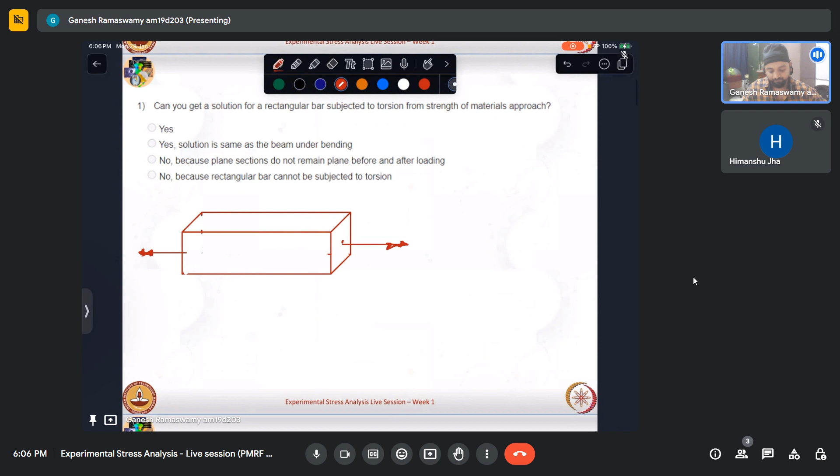So from strength of materials, what is it that we know? We basically make an assumption on the displacement and verify that with certain experiments if that is indeed holding. If that is holding, it helps us to get to the actual stress analysis without having to solve differential equations. So here the basic assumption is that the plane sections remain plane before and after loading.

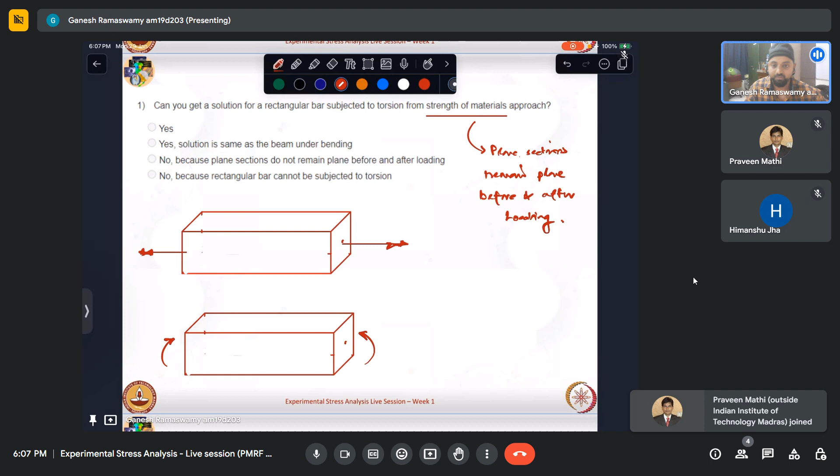So what does this basically imply? If this same beam, let us say this rectangular bar, if I was to bend this by applying two moments at the ends, that is if I take the same thing and apply couples at the end, then we know that this is subjected to pure bending. What is meant by pure bending? Essentially, there is a constant bending moment, so there is no shear in this beam.

In such a case, when we look at the deformed shape, if I were to just take this front face and view it as a two-dimensional figure, the deformed shape will be something like that. I'll just roughly draw this. So if I were to take a plane like that, the plane would be deformed to a plane like that. So whatever be the neutral axis that I have, the angle that the plane is making will be preserved. So it will still be normal. So that is the essence of plane sections remaining plane.

Whereas if we were to look at the case of torsion, this assumption of plane sections remaining plane before and after loading only holds in the case of a circular shaft. And this can be shown by experiments also. So there is a course on strength of materials offered by Professor K. Ramesh, a newly launched course that is also available on YouTube as well as the Swayam portal. So interested people can just watch a lecture on torsion, thought experiments, something, the name goes something like that. That actually shows an experiment conducted on a shaft where we are able to see that the plane sections indeed remain plane even after a torque is applied, even when it twists. Whereas that is not the case when we have a rectangular shaft.

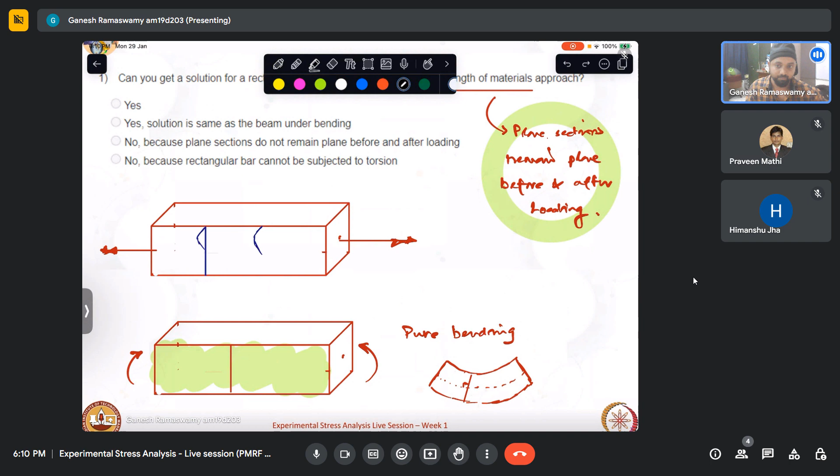So what happens here is essentially we will be seeing a line that is drawn like that will deviate like this. So it will no longer remain straight. So essentially we will have some out of plane displacement. If this is the plane, we will have some out of plane displacements, which is known as warping. So rectangular shafts are subjected to warping.

Does that mean that we cannot get the solution for rectangular shaft subjected to torsion? It is not so. We can get it provided we approach it from the stress potential, that is the theory of elasticity approach, rather than the strength of materials approach. So from strength of materials approach, this problem is consciously avoided. When we talk about torsion in strength of materials, we directly start with the circular shaft and we end it there. We don't discuss other shapes. A circle, and at best we will discuss hollow sections, that is axisymmetric, but we don't discuss rectangles and square shafts, whereas these are also used in practice. So the solution for this can be obtained using theory of elasticity approach.

So essentially plane sections do not remain plane in this case, which is why we cannot get the solution from strength of materials. The fourth option doesn't make sense, essentially we cannot constrain a bar from being subjected to any type of load, it depends on where the component is placed. So this is not in our hands, but whether we can analyze that using our theory is the essence of this question. So I suppose that that is clear.

The next question says displacement is represented as a number, a vector, a tensor, or can be any of the above. So which one do you think is the answer? Essentially, what do we mean by a number, a tensor and a vector? Take any mechanical quantity in a boundary value problem. Let us say we have a domain, and at that domain we have some point, subjected to some load. Essentially, displacement is a vector, but I'll go through a brief on what a tensor is and what a scalar number represents.

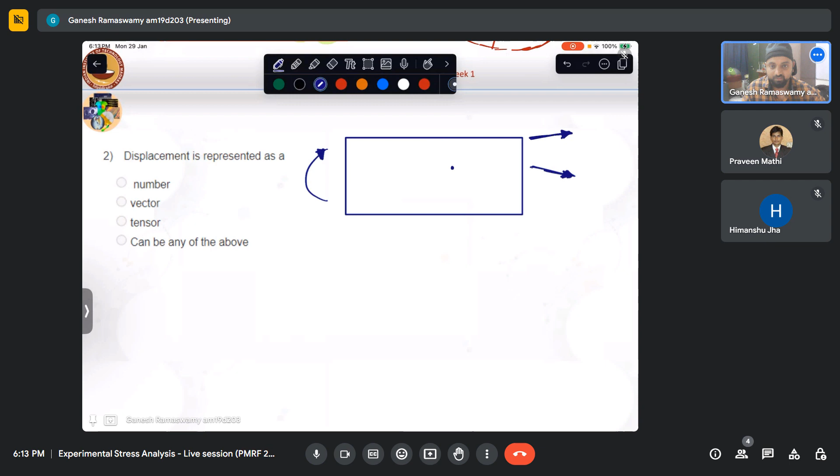If I take this point and zoom in, I'm only talking about the in-plane response right now, not the out-of-plane response. We essentially have four planes: plane 1, plane 2, plane 3, and plane 4. At each of these planes, I have some sort of traction acting. When it is dependent on the plane as well as the direction of the force applied, it has dependence on two directions. That is why it is called a second order tensor. So stress and strain are second order tensors.

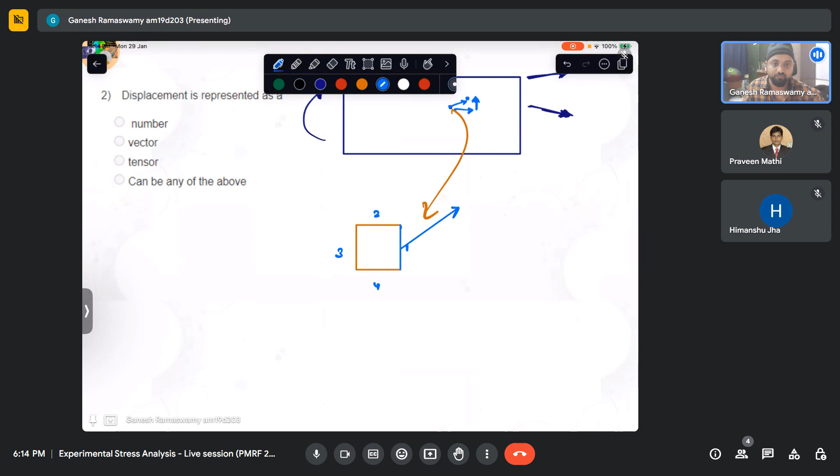Whereas displacement has only three components. Anywhere in three-dimensional space, we can characterize displacement. This point moves to here, and we can characterize that by the three displacement components: u, v, and w. Since we are talking about the same plane, the displacement along w, the out-of-plane displacement, would be 0. So that is why displacement is represented as a vector.

In any mechanical problem, the idea is to relate forces to displacements. In engineering mechanics, if we idealize the body as rigid, we have seen how these two are related. Whatever force we apply creates an acceleration, and acceleration is nothing but the second derivative of the displacement. So F equals m u double dot, if I call the displacement u. That is how this is related.

Whereas when we talk about deformable bodies, and in reality all bodies are deformable, we need to go to strains. From there, we need to relate them to stresses. This stress is at a point, so as a whole we need to integrate it throughout the domain of the body in order to get to forces. This is the basic route in which we go: from displacements to strains, which is our strain, then stress, and that is forces.

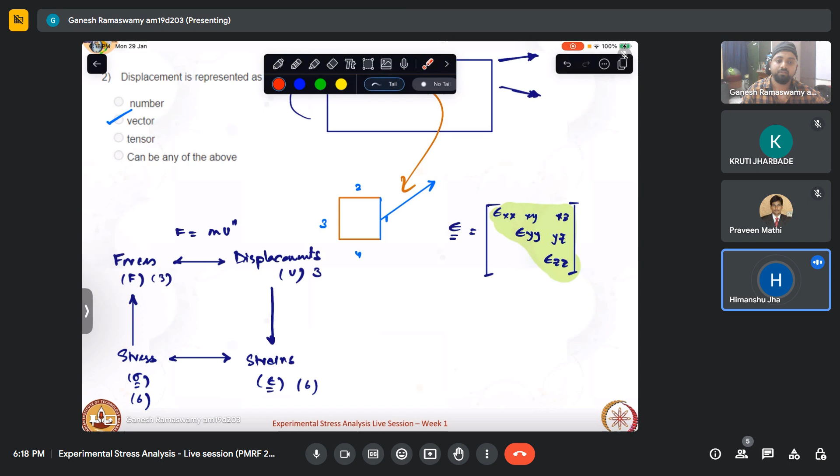So the thing is, at a plane, whatever quantity is under consideration, it has a dependence on the plane as well as the direction in which it is applied. For example, this plane can have forces applied in infinite directions. So there is one directional dependence that is characterized by this very plane. What is a plane characterized by? How do you identify any plane? We identify it by its outward normal. And then we have a force that is applied on this plane, which can be in any arbitrary direction.

Let us say that is the direction. So this is direction number 1. This is direction number 2. And then we have a magnitude associated with that force that is being applied. So a single magnitude, and then a bidirectional dependence. That is, two directions it is dependent on. So that is why we are able to see that there are two subscripts here, right? One represents the plane on which we are considering it, and the other represents the direction in which the quantity is going. So when these two come into the dependence, it is called a second order tensor. Is that clear?

What is the rank? Yeah, rank is, as I said, the two directions that are there, right? First is the direction in which the force is applied, and the plane that we are considering, the direction that is characterizing the outward normal. So these are the two. So this is the rank.

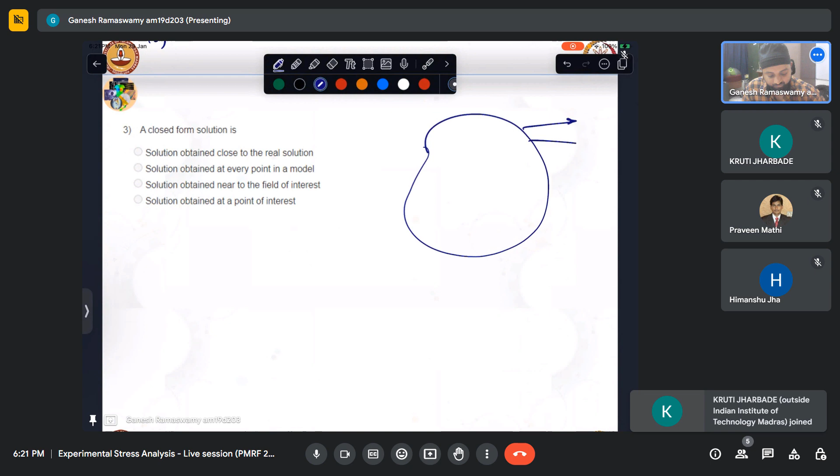So let us get to the next question. This says a closed form solution is which of the following? The first option is the solution obtained close to the real solution, solution obtained at every point in the model, solution obtained near to the field of interest, solution obtained at the point of interest. So if we see, essentially, if we have a body and then it is subjected to some forces, it is constrained also, maybe at some point.

So by analytical means, what is our interest? Essentially, our interest in stress analysis is to be able to compute displacements, strains, and stresses. So in any problem, if we are able to compute these three at every point in the model domain, given any point, I can get an expression. Let us say this is x, this is y, and then we have z. For example, if we take the XYZ coordinate system, in this body subjected to a particular kind of loading and support constraints, given the coordinates of any material point in this body, if I'm able to get all of these quantities, it is called a closed form solution.

So closed form solutions essentially, as it is said in the lecture also, it is a luxury to get. Not all problems have closed form solutions. So our first attempt is the closed form solution. If we can get that by any means, we go about doing that.

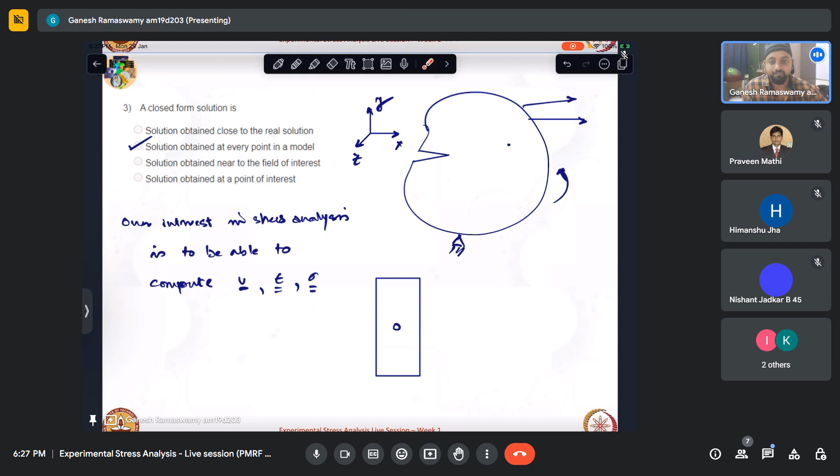Solution obtained near to the field of interest is again some kind of approximation that we are making, and it is obtained at a point. Now this generally happens in experiments, where certain techniques are labeled appropriately as point by point techniques. So we can only get one piece of information at one point. If we have to get this information at another point, then we have to redo the experiment again. So that is essentially a point by point solution. You can say in a way that the integration of this point by point technique over the entire domain of our interest, the material body, is what gives us the closed form solution. So I hope that is clear.

So if there are any questions, you please feel free to ask. In the meantime, I'll move on. Okay.

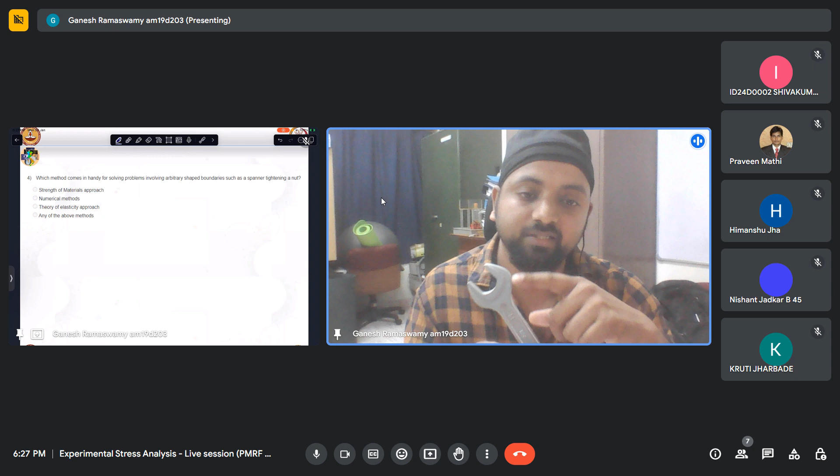So which method is handy in solving problems involving arbitrary shaped boundaries such as a spanner tightening a nut? As we saw, you can see clearly that this is characterized by a particular curve. This may be an amalgamation of many curves. In order to characterize this body, first, this is a boundary value problem because this has a fixed domain. So I have to define my boundary conditions over this domain. Now, can I characterize a coordinate system that can capture this entire curve? That is a big challenge. That is why we don't have closed form solutions for this, because it is not possible to capture the entire boundary, the entire domain using our normal analytical coordinates.

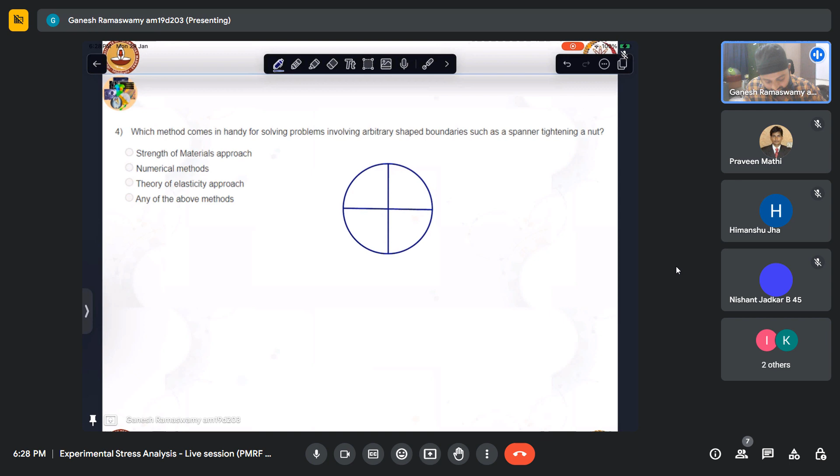So we have to resort to numerical modeling in order to do that, because the essence of numerical modeling is that it will divide this entire domain into very small parts. So for example, if I have to take a circle and I am constrained that I have to recreate the circle only using triangles, the first attempt I can make is like that.

So for example, this will be my first attempt at that. I can see that it is not representing the circle faithfully. It is just a crude approximation. So the next will be, let us say that I make it finer. Now this time I can have more points like these. So what this does is this makes it a little finer. I'll close with this. I won't draw all the possible combinations naturally.

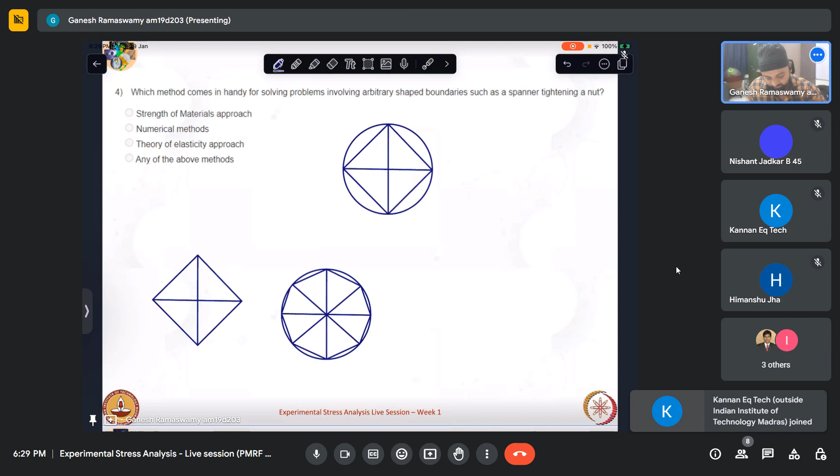So if I were to close this, and let us say I remove this, now I can see that this is a much better approximation of the geometry, of the circular geometry. So like this, if I were to make the size of this triangle very, very narrow, then it is approximately approaching the actual boundary. So this is what numerical methods do. That is why we are able to solve complex boundaries using numerical techniques.

So each and every one of these elements has to be put in one form and solved in order to get the response of this actual circle under some mechanical stress. So that is how numerical approaches go about solving these. So the advantage is that any type of complex boundary, I can capture it and make the computer run simulations in order to run calculations to get my stresses. So that is why numerical techniques can handle this problem conveniently.

The strength of material approach is anyway very limited, even within its scope, to very simple problems like a rectangular beam under bending, a circular shaft under torsion. As we saw, even a rectangular shaft under torsion cannot be approached using the strength of material approach. So that also requires a theory of elasticity approach. And even with this, there are only a handful of problems that we can solve. Essentially, how theory of elasticity got developed is we formulated the solutions first using the stress potential approach, and then we tried to fit it to different problems that were prevalent at that time. It's quite useful, but nonetheless, it is not exhaustive. In order to solve even a day-to-day problem like a spanner tightening a nut, we require numerical methods.

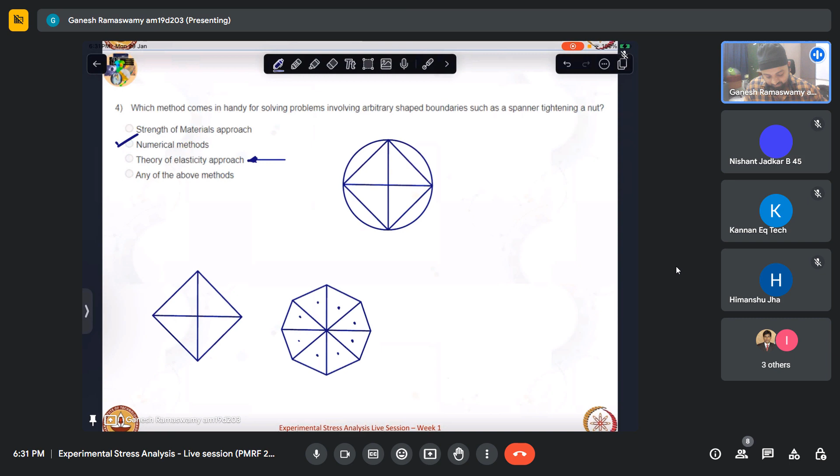Now, this being one constraint, if numerical methods can solve everything, that begs the question, then why at all do we need experiments? In numerical methods, we are only defining the boundary conditions and the geometry. So there is no confirmation that what we have defined is correct. It is not objective in that way. Any number of people can define it in any form, but ultimately there is only one response that needs to be captured. So how close we go towards that response is what the entire thing is about.

So that is why it is desirable that when we make a numerical model for a complex problem, at least one load case, if we were able to demonstrate that the response of that numerical model is similar to that observed in actual practice, then we are at least confident that whatever modeling we have done is faithfully capturing the phenomenon. Then what is the way to observe the actual response? That we do experiments on the actual prototype.

Now, there are certain problems which are too big to be accommodated with the actual prototype. For example, in the shipping industry, if we want to do stress analysis on some big ship and test the numerical model, making an entire ship is not a workable solution. So that is when we try to scale it down and create model experiments capturing the essence. A model experiment has a challenge that our loading jigs should be appropriately modeled in order to apply loads that are similar to the actual real life situation. So there are challenges at every step, but nonetheless, using all these wisely with engineering acumen, we try to approach the problems and do our design evaluation.

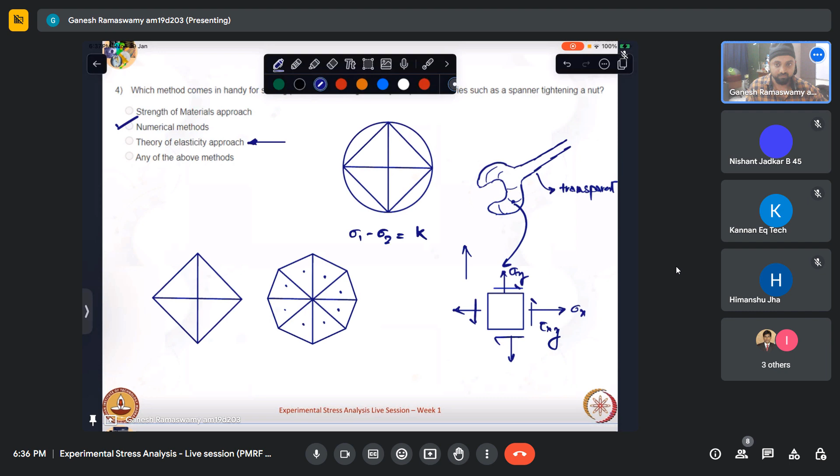Is it clear, sir? Someone who had asked that question. Have I answered you at least partially? Yeah, so how this pattern gets formed, that we will see as we go about in the course when we discuss the essence of how transmission photoelasticity works.

So, why are we trying to see this? What has this got to do with our stress analysis? It is because the technique of photoelasticity is based on the principle of stress induced birefringence. So when we talk about refractive index, we are of the notion that there is only one refractive index for one material. There are certain specific materials which, when they are stressed, develop two refractive indices. So that means there are two different velocities of light through the very same medium when it is stressed. What these two velocities bring about, what changes they bring about, is what we are trying to study, and this manifests itself in the form of fringes. So that is why we are trying to introduce certain things now so that we are familiar with these terms. When we go to the development of transmission photoelasticity, it will not be that hard for us to take it from there.

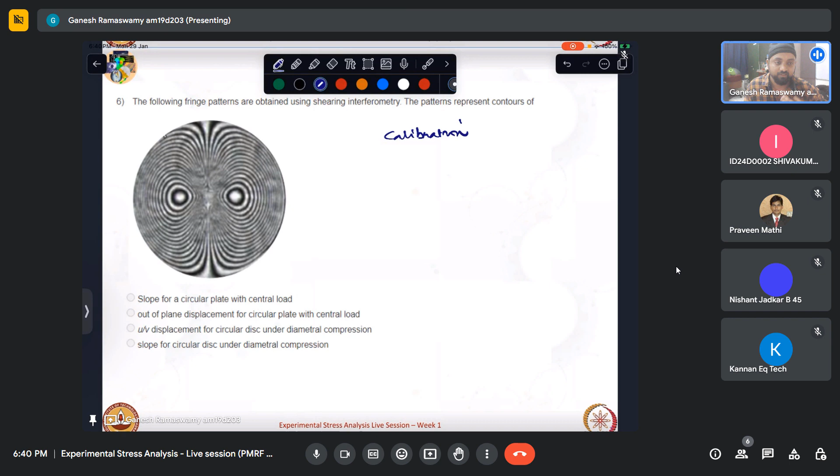Now, for the unknown problem that we are trying to study, we don't know what to anticipate. So naturally, before we conduct the experiment for an unknown problem, we will conduct it for a known problem. There are certain benchmark known problems that have developed over time. From strength of material, it could be 4-point bending, pure bending, that is.

From theory of elasticity, there is a disk under compression along the diameter. This is one of the problems. Each and every problem has its own application. That is, each and every experimental method will employ one type of problem which will be standardized for that, which will be used to see if all the connections, all the setup is correct. Once we are confident that that is correct, then we will move on to conducting the actual test experiment, which we are trying to study.

In that respect, now we saw that there are displacement components that we have to measure. There are strain components that we have to measure, as well as stress components that we have to measure. There is no experimental technique that can measure all of these. So every experimental technique is limited to measuring certain quantities out of these. Now when we are talking about in-plane response, that is, there is a disk which is subjected to this type of loading.

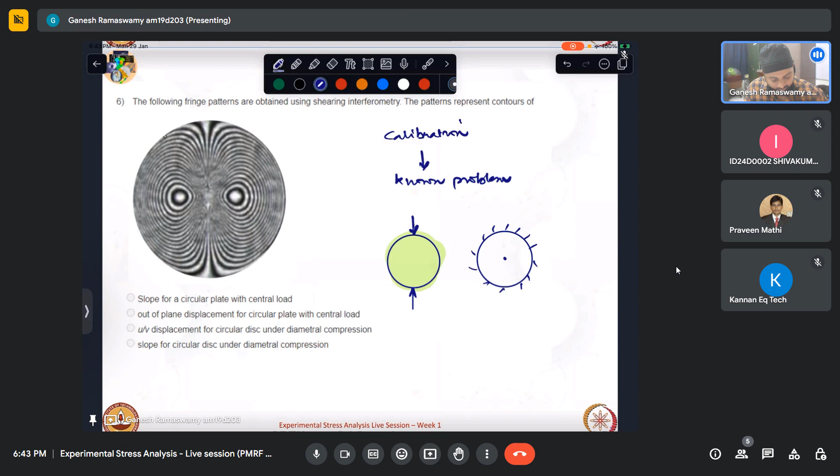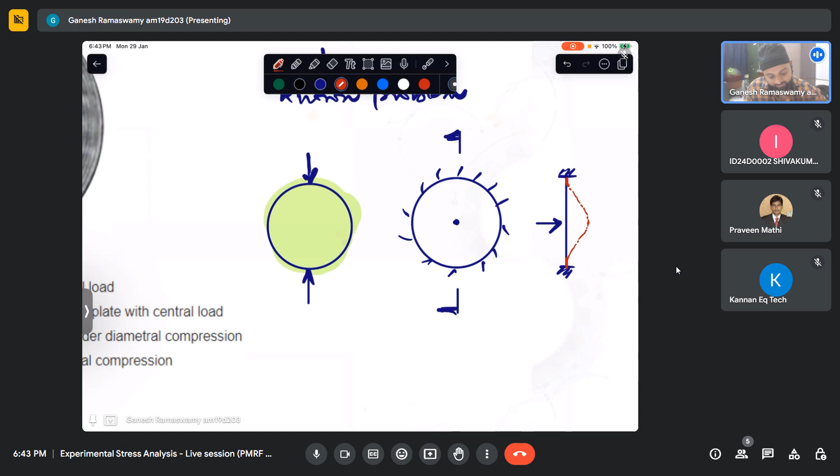This load is actually applied into the plane of the paper. I hope you can visualize that. That is, if I were to view it like this, what I will see is a plate that is clamped, which is loaded like this. And how will its deformed shape be? I know that slope here will be 0. Here, because it is symmetrically loaded, based on symmetry, I can say the maximum displacement will be at the center. It will again go back to 0. And because it's an axisymmetric problem, this curve will be symmetrical about the horizontal. So this happens to be the standard problem for the techniques that measure out of plane displacements.

Now, for this problem of a clamped circular plate subjected to a central load, we have a closed form expression from theory of elasticity. If any of you have done a course on plates and shells, this will be the first problem you will solve when you go to polar coordinates from rectangular coordinates. So for this, we generally use the general Michell solution, and then we take advantage of the axisymmetric nature of the solution. So there is no angular dependence, there is only radial dependence. Like that, we will try to apply the boundary conditions and come up with the solution. Those solutions are already given in one of the lectures from the first three.

Now, those closed form solutions, what does that mean? By taking this as the origin, for any r, if I have a point here, it is at a distance r. So at any r, I'll be able to get the out of plane displacement. If I were to plot this using contours, let us say my curve is like that. What is it that I'll do? I'll run lines like that. At each and every such plane, whatever I'm seeing, I will try to club it.

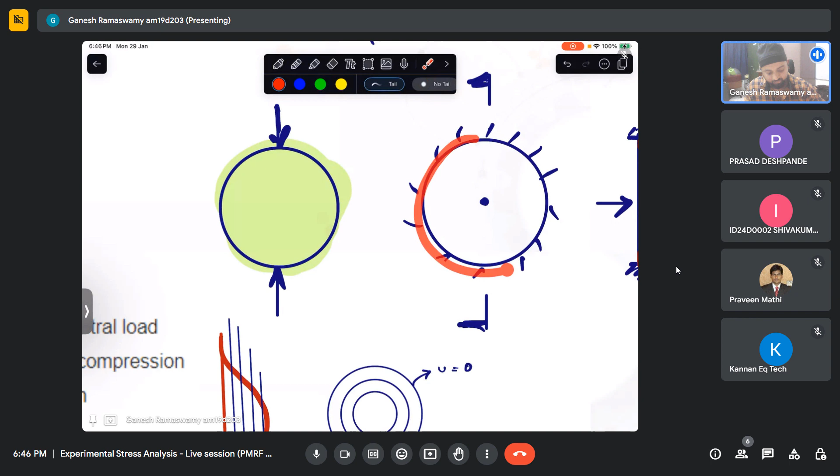What this represents is the out of plane displacement. Initially, there will be displacement equal to 0. Why displacement equal to 0? Because this is clamped around the border. Around the border, there is no out of plane displacement. Then there will be displacement equal to 1, 2. I'm just saying integers. It will be a continuous curve. So like that, it will be concentric circles. Such a curve is essentially the representation of out of plane displacement.

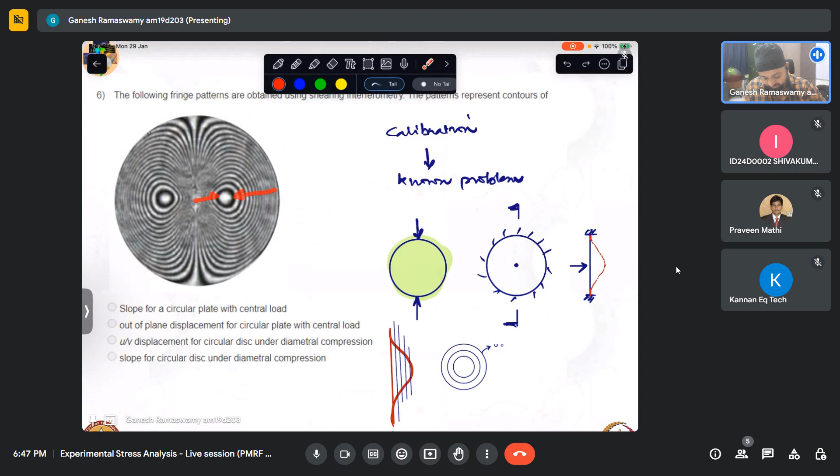Here we are able to see that this shows a peak here as well as a peak here, and then it shows a reversal. Why that happens is because this is clamped at these ends, we have an inflection point here. So essentially, this is nothing but the slope. You can readily see this in the lecture. This pattern is shown and it is already labeled as slope. I'm just trying to walk you through how this came about and to think about what that pattern might represent.

Now, let us say the disk would have been clamped at the ends, and then at the center an out of plane load is applied. But I'm able to see that the response is actually this way. Here there seems to be no reversal. So it is safe to assume that the reversal is a function of x. So this is nothing but the slope of the circular plate in the x direction.

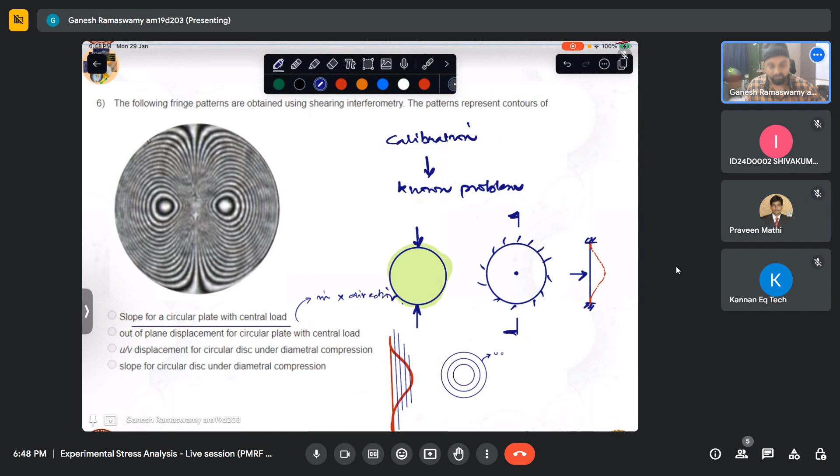Now because of axis symmetry, how will it look in the y direction? What I meant is when we look at this in the y direction, essentially these two eyes will appear there instead of horizontal. So that will be the slope in the y direction. So this is nothing but our slope in the x direction.

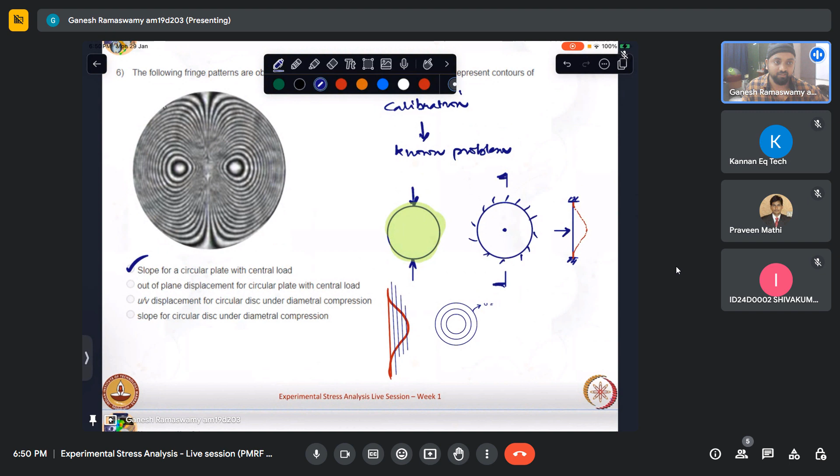Out of plane displacement of a circular plate with a central load, we know that because of the axis symmetry, it has to be a symmetric pattern. This essentially is not a symmetric pattern about the vertical. So this definitely cannot be out of plane displacement because the problem is symmetric. So like that also you can start reasoning it out.

But I would encourage any of you who is interested to at least plot these patterns once and see. It is not very difficult. You already have the expression in MATLAB. You just have to type these out, MATLAB or Mathematica, whichever you are comfortable with, and plot the contours and see how they look. When you have a visual appreciation of that, and then go do the experiment, it'll be more exciting that way. So I hope that is clear.

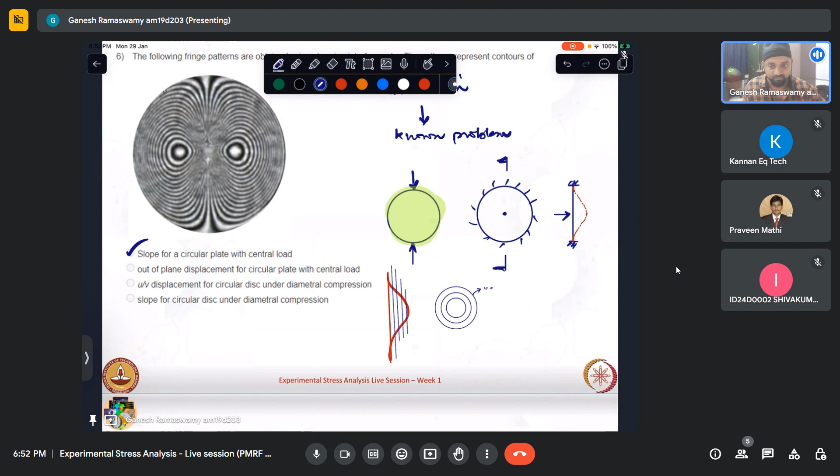Are there any questions? Not necessarily related to this aspect, but in general in stress analysis? Because otherwise, it is just one way I'll go on solving problems. It will be a little dry. So if you have any questions, please feel free to stop me and ask them midway. Okay. Yes, sir, please go ahead. Okay, no problem. I'll be sharing these videos also, so you can catch up collectively. And if you have any questions, you can bring them up as and when you get them.

Okay. So question 7. On solving a beam under pure bending using analytical method, taking plane stress assumption, one gets which of the following? So first, let us draw the beam that they are talking about. Since it is plane stress assumption, I need not worry about the out of plane response. So I may as well confine my beam to this plane. So this is my beam. Now it says that the beam is subjected to pure bending. So let me take this beam and subject it to pure bending. What does that mean? It is subjected to a constant bending moment throughout. Let us call that M.

Okay. So now, how will this get deformed? We know it will get deformed something like that. Something like that.

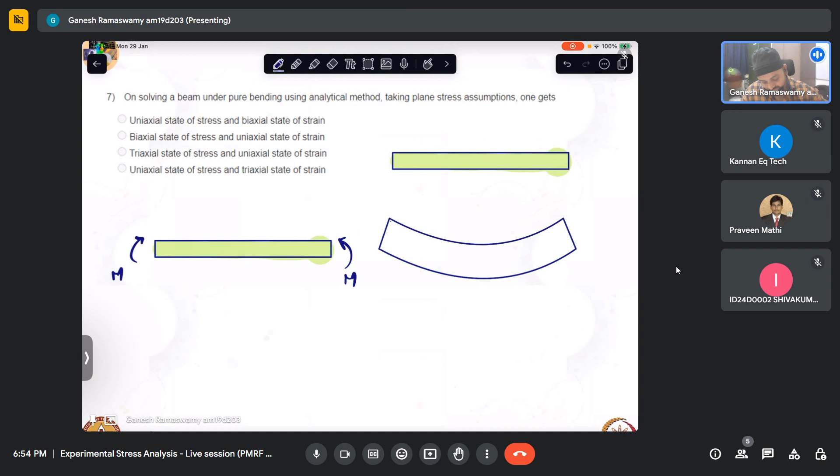So the top fiber will be in compression, the bottom fiber will be in tension. Okay. So now, if this is my neutral axis, at any point from the flexure formula, what is it that I know? I won't derive the flexure formula because that is already done in our strength of materials course. You can just revisit that.

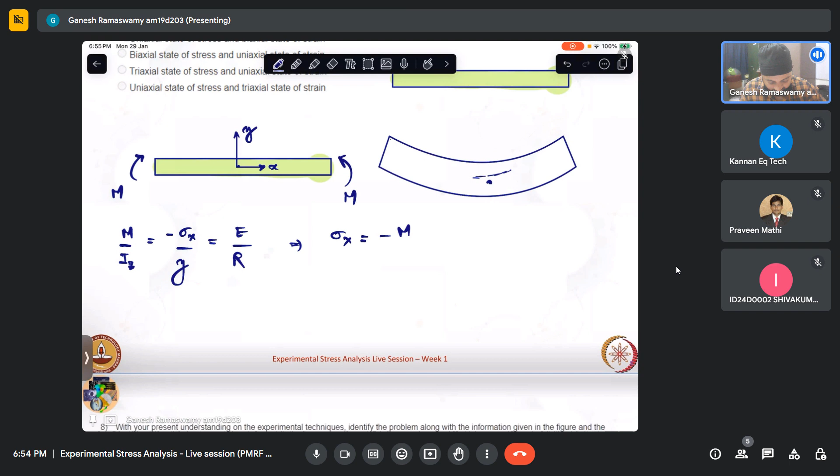So it says M by Iz essentially, with this as X, this as Y. So XY. So Z will be out of the plane of the paper. So sigma x by y equals minus E by R, or rho, or whatever you take to represent the radius of curvature. So what we are able to see here is sigma x, given a moment, is nothing but minus M by Iz into y.

The section is not changing. The bending moment applied, I have applied, is not changing. So essentially, this quantity is a constant. So I can see that my sigma x is proportional to y. So it is having a linear variation.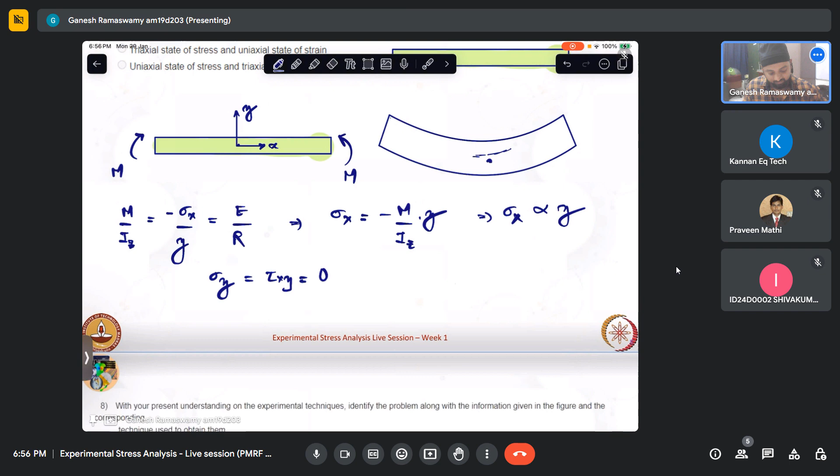Now, what they are asking is, again, this is only talking about sigma x. Sigma y and tau xy come out to be 0. Why? Tau xy is 0 because there is no shear. Sigma y again is 0 because there is no traction in the y direction. So essentially we have only one stress component, which is sigma x, which varies linearly. So if I have a line like that, it will vary linearly. This is compression, this is tension. That is the variation of sigma x about the neutral axis.

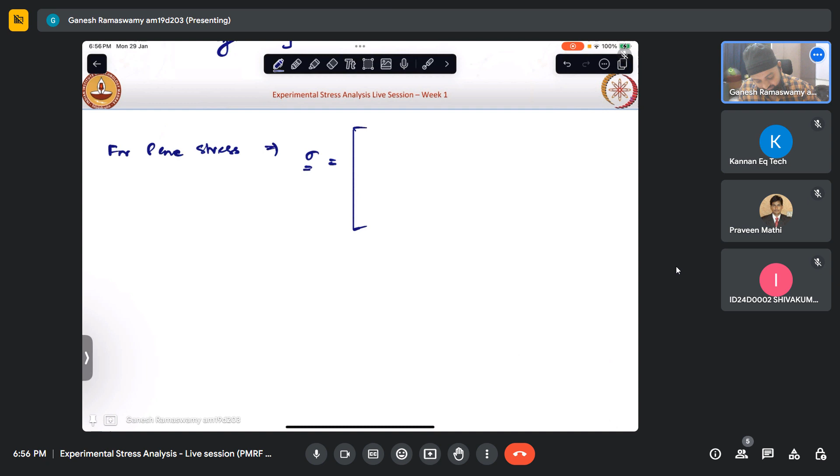So if I have to represent this stress state, what does a stress tensor look like? Let me not say plane stress. In general, how do we populate a stress tensor? So this is sigma xx, sigma yy, sigma zz, sigma xy, or tau xy, let me say tau xy rather. And these are just symmetrical, so I'm not going to write them.

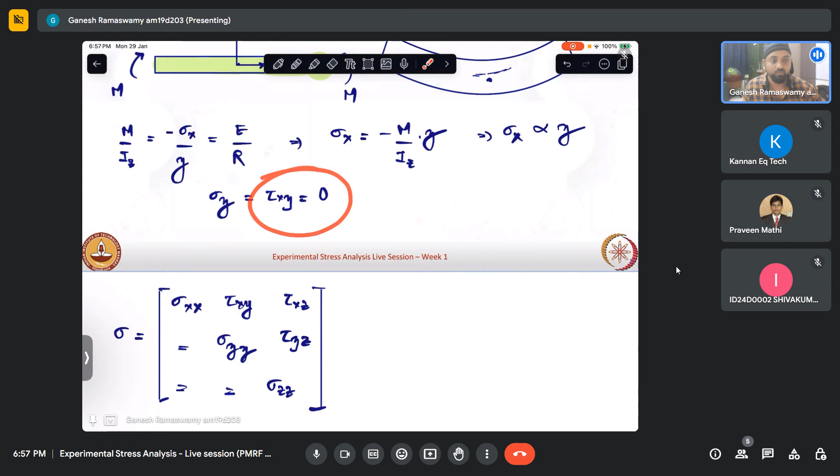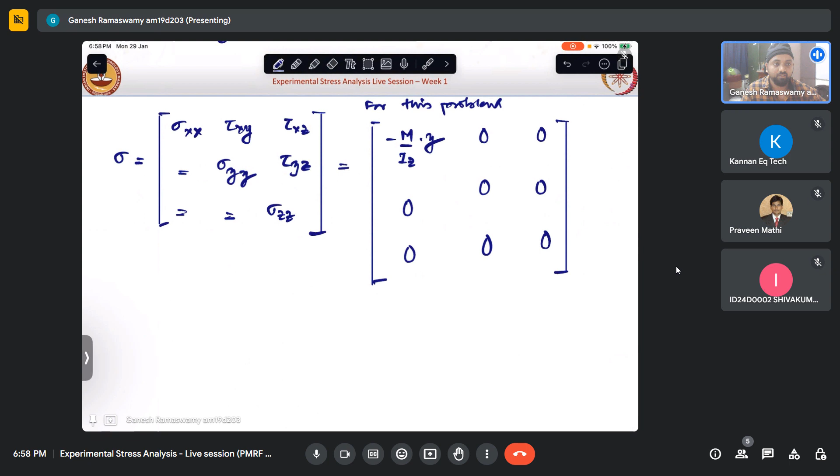Now, if I were to populate my stress tensor for this problem, I know from here that sigma x is nothing but some constant into y. Sigma y is 0. Tau xy is 0. So let me populate this for this problem. I have this as minus M by Iz into y. So the first term is done. We have seen tau xy is 0 because there is no shear. Sigma yy we know is 0 because there is no traction. Now, by virtue of our plane stress, all the out of plane stresses are 0. So this is 0 and this is also 0. So this is my stress tensor essentially, which is uniaxial stress.

Now let us go to strain. So how do we define strain? Strain is nothing but stress by E minus mu by E trace of sigma I, the constitutive Hooke's law basically. What are the strain components? How do we calculate the strain components? Essentially, we know epsilon xx is nothing but sigma xx by E minus mu sigma yy by E minus mu sigma zz by E. And this goes on cyclically. Epsilon yy is this quantity

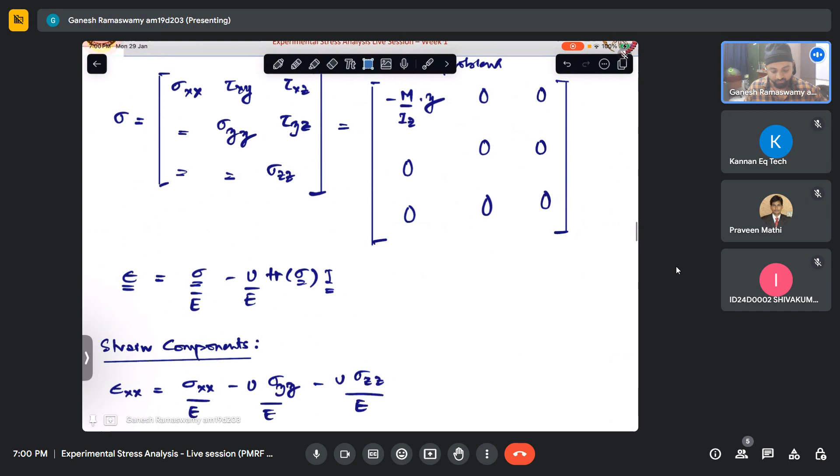minus mu, same thing will come here, and then epsilon zz is this minus mu. Let me write it this way. So this is the general Hooke's law. I'm writing only normal stresses. Shear stresses are anyway decoupled from the normal stresses. Shear strains are also decoupled from the normal strains. So when shear stresses are 0, shear strains are also 0. So I'm not talking about shear strain. Let me talk about only normal strains.

Now I can see, in the case of plane stress, I have sigma yy from my stress tensor. I know only sigma xx exists, the other two are 0. So I can knock off the other two terms. So sigma yy is 0, sigma zz is 0. I can see that because of the Poisson's effect, I still have non-zero quantities in the yy and zz directions. So anyway, I suppose many of you knew this, but I'm just writing this for the sake of completeness.

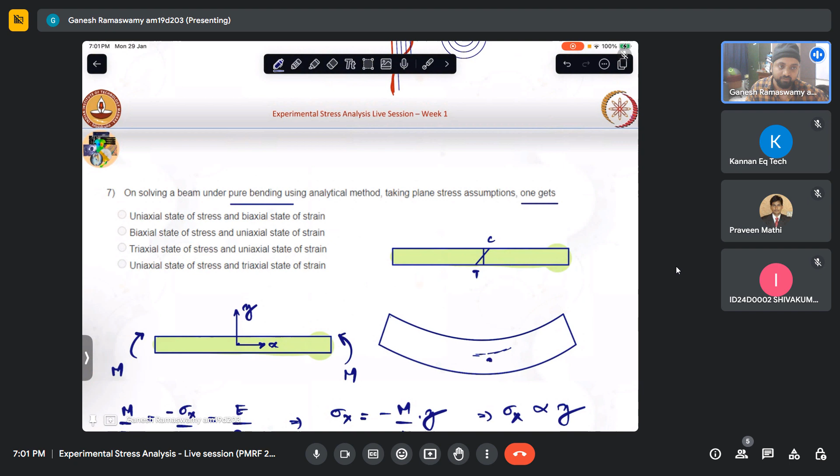So what this implies is, for the case of a beam under pure bending using analytical methods, taking the plane stress assumption, we have a uniaxial stress state and a triaxial state of strain. Why triaxial? Because we have epsilon xx, yy and zz. We have strain in three directions because of the Poisson's effect. So I hope that that is clear. If there are any questions, please feel free to ask.

Okay, fine. So let me move on to the next question. With your present understanding of the experimental techniques, present understanding meaning whatever is covered in week 1, identify the problem along with the information given in the figure and the corresponding technique to obtain them. Now one thing we can readily see is something like that is given. This essentially represents the

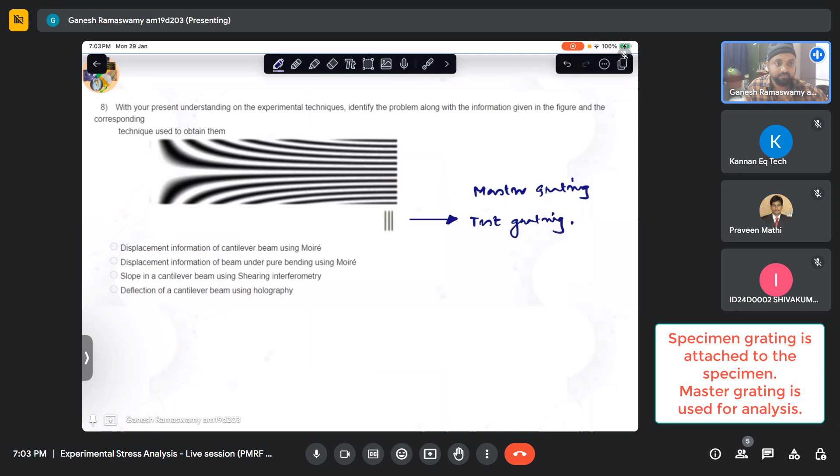There is something called a master grating, and then there is a name to this grating also. That is, the specimen grating will be applied to the specimen, and this grating, test grating, I'll just clarify that and mention it here. So let me just call it test grating as of now. So essentially, when we apply a master grating and then we view it with this, we'll get certain patterns because of interference. So this is essentially from the technique of Moire, which measures displacement components.

So from here we can see, if we go through the lectures also, we'll see that whenever a grating is put in one direction, we essentially get the displacement perpendicular to that grating direction. So we can see that our gratings are like this. So we will be getting displacements along this direction. If the grating were actually like this, then we will be getting displacement along the vertical. So here we are sure that our grating is vertical.

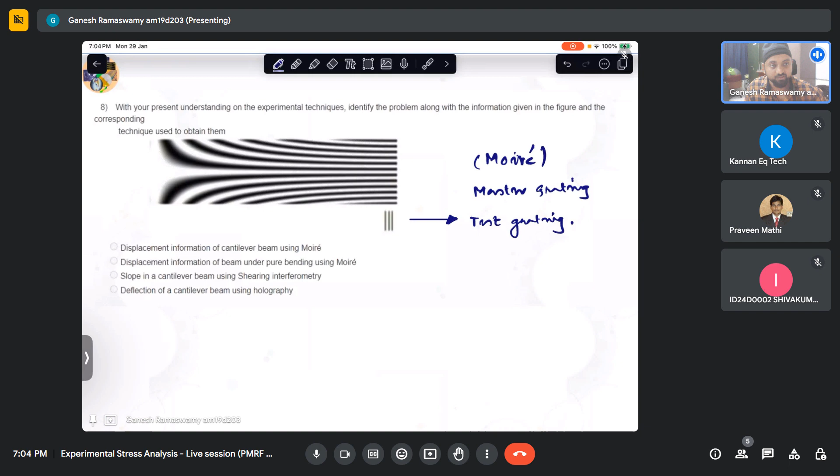So the displacement, first of all, this is Moire. So Moire measures displacement. So in that displacement, due to this grating direction, I can see this is specific to U displacement along X, where I define X like that, Y like that, and Z like that. So I am essentially having displacement along this direction. That is what I'm measuring with this grating.

And from the very problem, we can see, let us see the options. Displacement information, and then slope and deflection. Since we are having a grating, we are talking about displacement only. So slope is not the answer. Now, deflection of a cantilever beam. Essentially, deflection, if we consider this to be the cantilever beam, will be in the vertical direction. And since we have already deduced that this is in the x direction, this is not the answer.

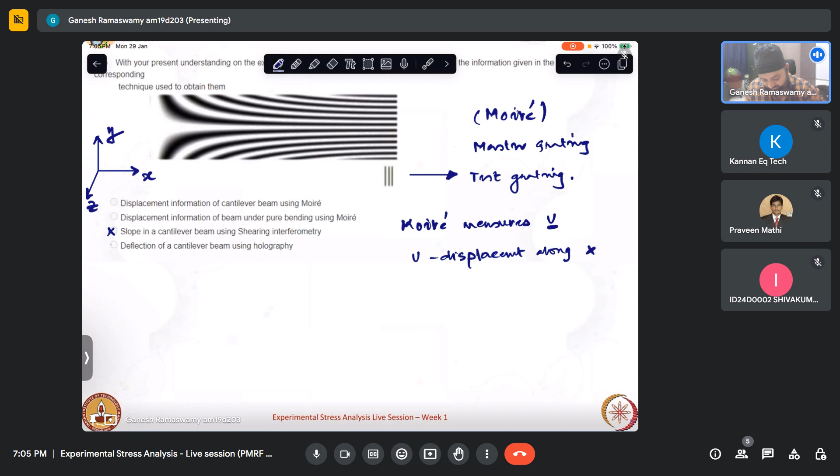And from that very pattern, we can see that displacement information for a beam under pure bending using Moire. We know that pure bending is a symmetrical problem about the vertical as well as the horizontal. Whereas we don't see symmetry about this. About the vertical, we don't see symmetry. We only see symmetry about the horizontal. So it cannot be a beam under pure bending. So it is essentially a cantilever beam subject to a load at the end.

So what I'm trying to say is you also look at the options and try to holistically reason out why certain options cannot be the answer based on symmetry arguments or based on the grating direction. So that is why it said whatever knowledge you have of the experimental technique and your background on the theory of elasticity and strength of materials, you are expected to answer this.

So what we are looking at is we have a cantilever beam that is clamped at one end, applied with a load on the other. This has one type of grating. So we have put a master grating over that cantilever beam, and then we have our test grating or whatever that term is. I'll write it clearly when I post this. It is mentioned in the lecture. So when we view it from that grating, we essentially see patterns. We will see these type of patterns, which represents the displacement in the direction perpendicular to that grating. So I hope that that is clear.

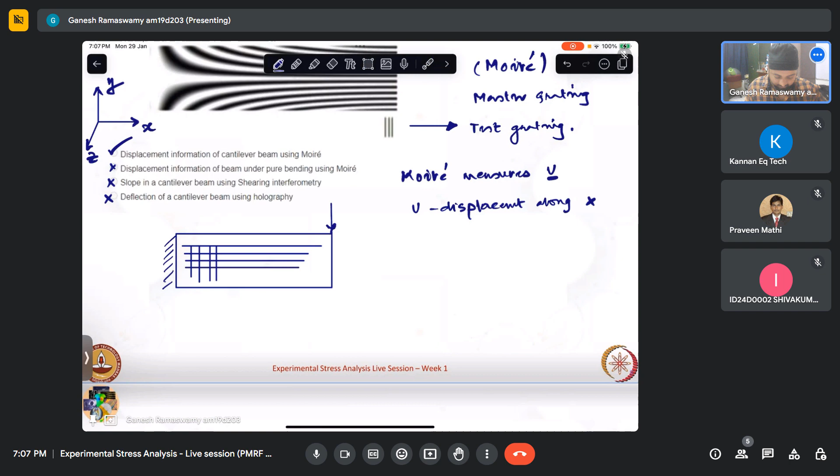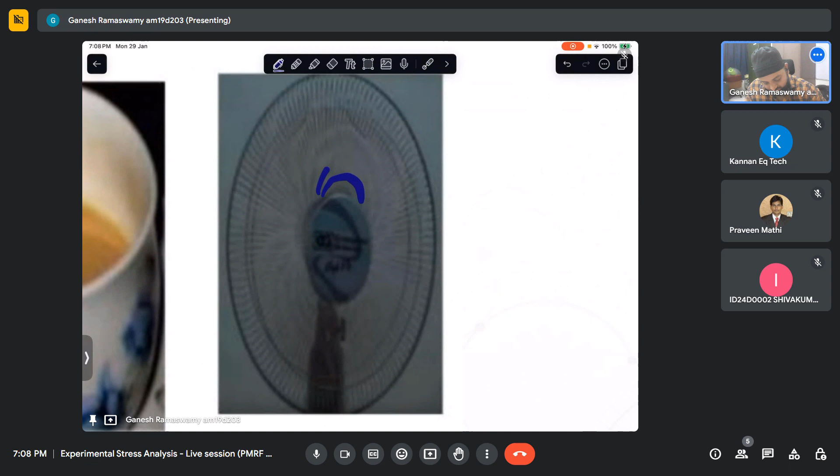Okay, so I'll move on to this question. Match the following. Choose the appropriate letters A, B, C, D, with A being this femur, B being this circular pattern, C being this cup, D being this. Now, before we go, we are able to see here certain patterns like this. I hope you are able to see. There is one. So there are patterns like this, which are getting formed due to interference. And this is what Moire patterns look like.

Essentially here, when the light falls on this, it gets reflected and reinforced, and it leads to the formation of this shape. So why we are trying to see this is because this curved surface is responsible for the formation of this cusp, and which is called the method of caustics. Well, the principle is called caustics. Now, when we saw that a curved surface is able to bring this, when we take a body and apply load to it, and if it gets curved, and if we impinge certain controlled light over it, and obtain how it gets reflected on a screen or recording medium, then we can interpret such patterns which can be correlated to its curvature, out of plane displacement, and so on. So that is the essence behind this.

Here, because there are two patterns, there is interference between these two, and we are able to see patterns. If we take a table fan's frame, there are two frames posed like this, and when it is moving, it creates this pattern. Consider the backside frame to be stuck to a specimen, and the front frame is what you are holding to see it. Instead of the fan rotating, let that specimen bend or twist, and that will also lead to that pattern's movement, and we will see an interference pattern.

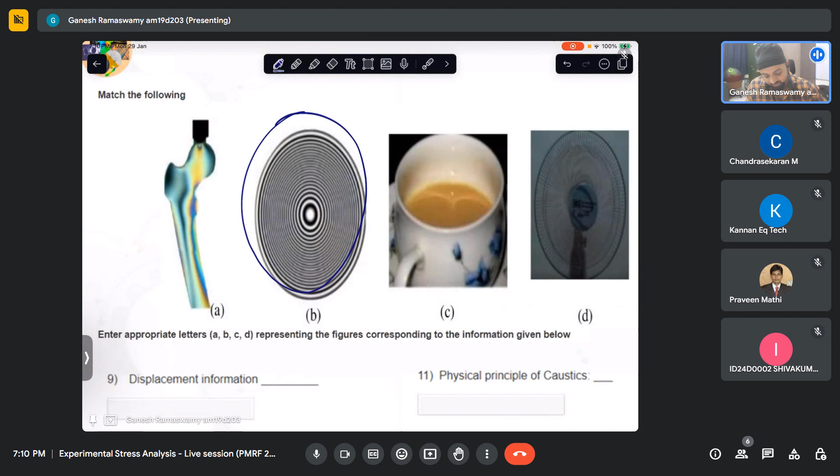That is the principle behind Moire, and we saw this is nothing but our out of plane displacement. This looks like an oblong, but actually it is a circle, it's some issue with the aspect ratio. This essentially is a circle only, and it is concentric. Here we are able to see again a very complex geometry.

As we saw for the spanner, this is even more complex than the spanner. This is for a human femur, so naturally analytical methods cannot capture this variation. This either has to be handled numerically using numerical models, or using experiments.

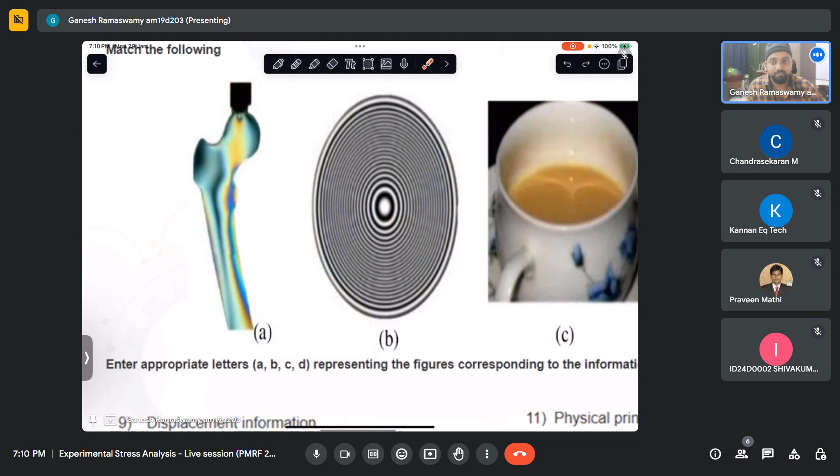As we have seen, we have a jig from where we are applying the load, and this seems to be showing some patterns, some colors in a specific order. We can see this is nothing but photoelasticity. These patterns are from photoelasticity, much similar to what we saw in the case of the spanner tightening a nut. Similar to that, we have patterns, not exactly the same. As we load it, certain colorful patterns emerge.

So, displacement information - which of these is displacement information? As we discussed in detail, B is the displacement of a clamped circular plate, the out of plane displacement of a clamped circular plate. So this is B, that is the W displacement of a clamped circular plate subjected to central loading, so I'll avoid writing that.

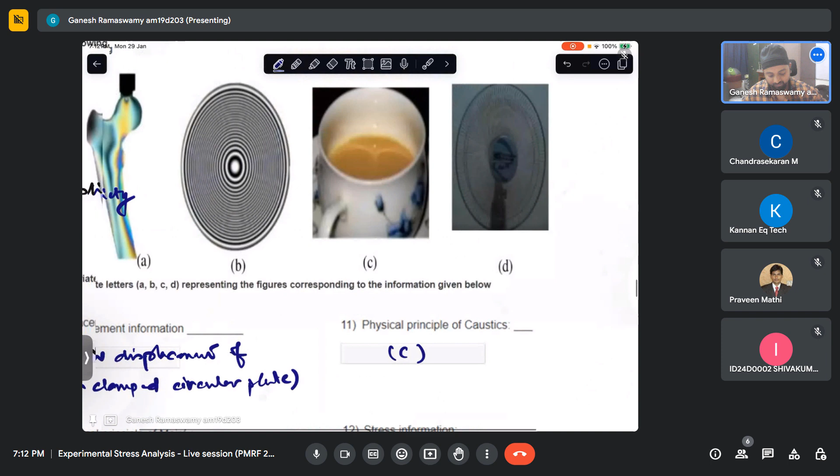The principle of caustics, as we saw, is because of this curvature it behaves like a lens which reinforces the light at certain points, leading to the formation of this pattern. We try to utilize the same thing in our mechanical stress analysis, so this is nothing but our C. For the principle of Moire, it is straightforward to see that B and C are not the options, and A is essentially photoelasticity.

So D is used for displacement measurement. The concept of Moire is used for displacement measurement, and stress information is from photoelasticity, A. What type of stress information? Essentially we are getting sigma 1 minus sigma 2 equal to some constant. What this constant is and how this equation is derived, we will see in subsequent weeks when we get into deriving the principles and equations for photoelasticity. For now, you can consider that it is giving contours of sigma 1 minus sigma 2. Contours means it is essentially a line joining points of some parameter value. So as we vary k, we will be getting different patterns.

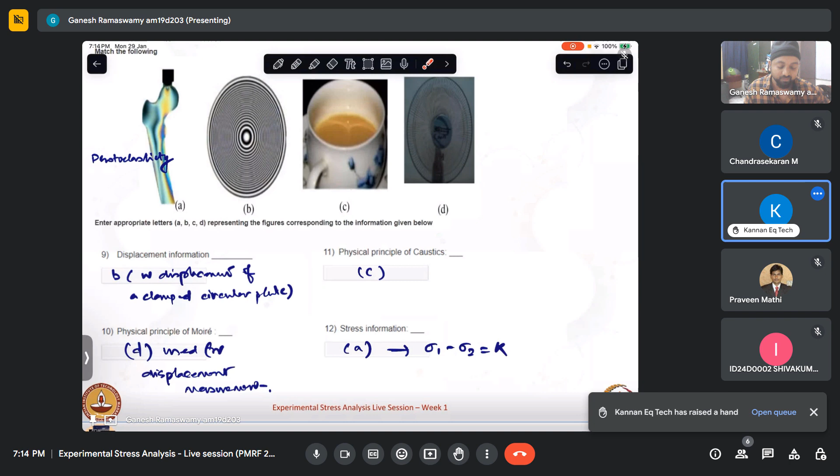That is the essence behind it. So are there any questions at this stage? Yes, please. Could you please repeat? I couldn't hear the first part of what you said.

No, it will get deformed like that, right? So the point goes like that. Yes, V, exactly.

Even in the case of a beam subjected to 4-point bending, there is U and V displacement, but we are essentially concerned only with one of them, because that is what is dominant. But essentially, if the entire beam had only one V displacement, it will be a rigid body motion - the beam will be here, then the next moment it will be here. Because we are holding it and twisting it, each point will get mapped onto another plane, which won't be essentially a translation - it will be translation plus rotation, which will cause U also. There is a closed form expression for U also. In the lecture, the U displacement is given for V.

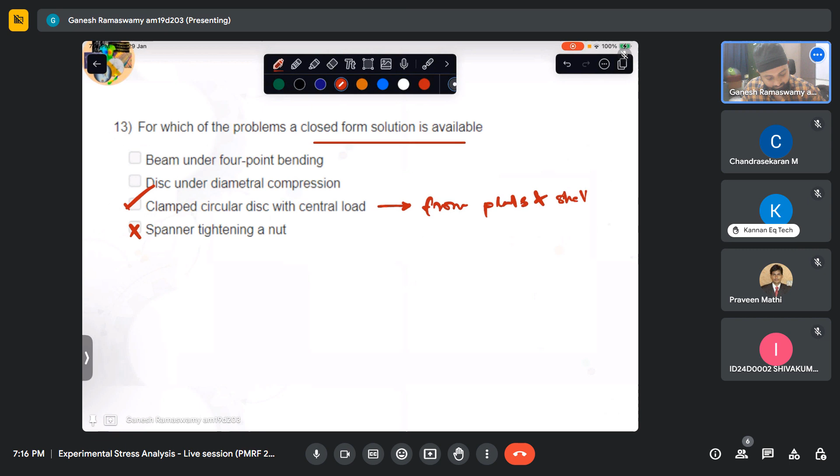Which of the following problems has a closed form solution available? Directly we can take out spanner tightening a nut, because we don't know a way to actually capture the geometry. Spanner doesn't have one. A clamped circular plate with a central load definitely has a closed form solution from plates and shells. That is theory of elasticity in polar coordinates when we see.

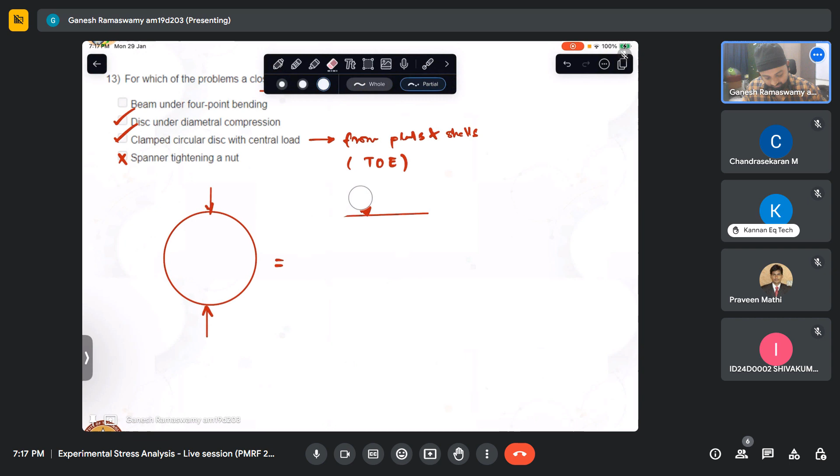Disk under diametral compression, we do have essentially how this problem is solved. It is a superposition of three separate problems. One is a problem of a semi-infinite plate subjected to a point load. This is a semi-infinite plate. The solution for this, plus one that is applied here,

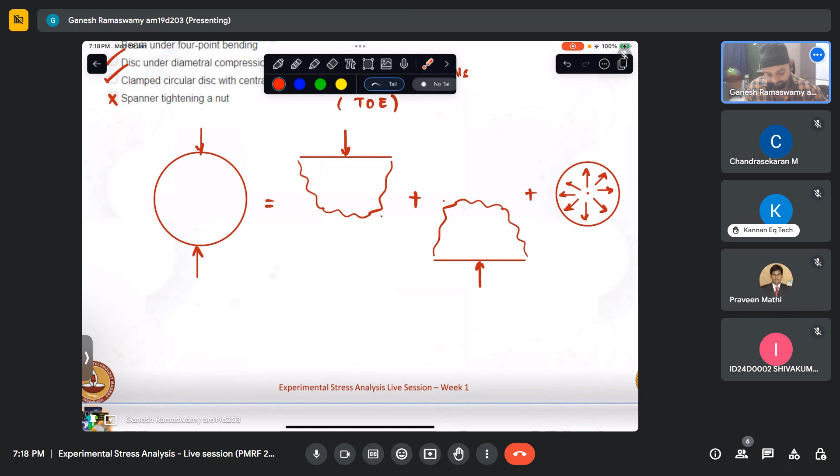plus a disk with radial tension. So these two, this problem and this problem, are celebrated problems that are solved in theory of elasticity. So happens that when we intelligently superimpose these, we get the equations for solving the disk under diametral compression. So this is possible using theory of elasticity. So a closed form solution is definitely available for this. And beam under 4-point bending we already know from our strength of materials. So this itself gives us the closed form solution at every point. So I hope that that is clear.

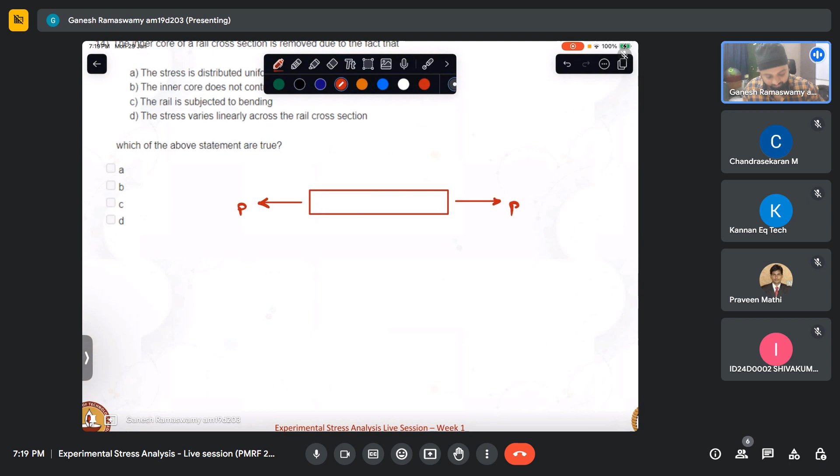Okay, so let us look at this question. The inner core of a rail cross section is removed due to which of the following is what is asked. Stress is distributed uniformly across the cross section. The inner core does not contribute to load sharing. The rail is subjected to bending. The stress varies linearly across the rail section. Now, let us consider a bar like this, and then we pull it on both the ends. Let us say that both are subjected to P. I am trying to pull that bar.

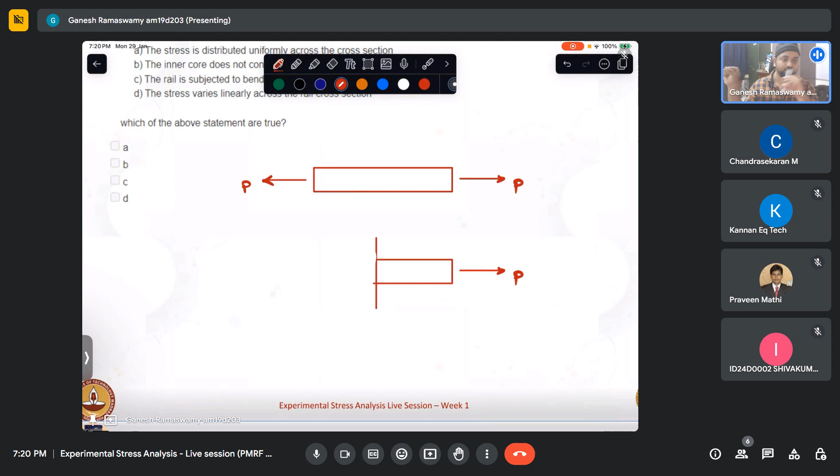If I were to take a virtual cut, I just cut the section virtually, not physically, just for the sake of my analysis. And I know that when I'm pulling the bar, it is not translating here or there. It is still in static equilibrium. What does that imply? That there must be some stress that gets developed over this area, which balances out P. Now we know that when we are sufficiently far away from the loading end, sigma is constant over the cross section. That is, integration of sigma over this dA gives me P. And from here we get sigma equal to P by A. So at each and every point across the depth, sigma is the same. And this only happens in the case of uniaxial tension.

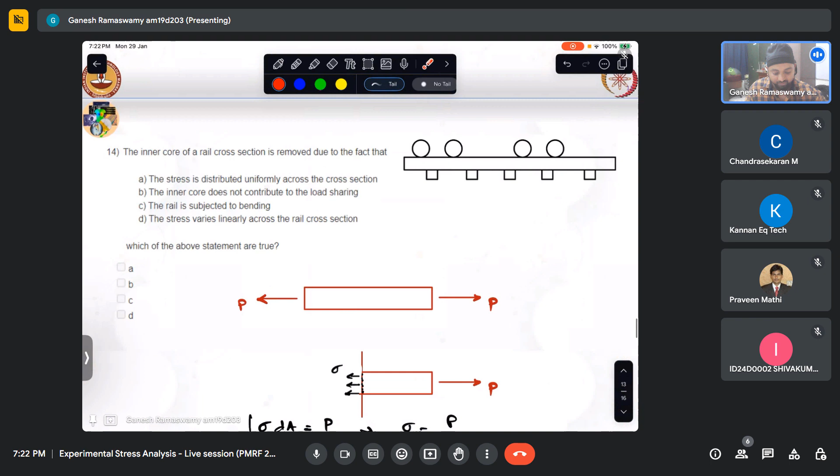And in the case of bending, this sigma cannot have a constant variation, that is for sure. It might not have a linear variation in the case shear is present, because the flexure formula is only valid when shear is absent, that is, it is subjected to constant bending moment. Whereas it might not necessarily be subjected to constant bending moment, in which case sigma x variation also might not be linear. So our rail is definitely subjected to bending, and it does not have a uniform stress state. So in general, for bending of beams, what is it that we do? We generally neglect the non-dominant quantities, which are nothing but shear in this case. In the case of bending, shear is very less. That is why even for cantilever beam, we apply the flexure formula. So we consider that it is varying linearly, and the inner core does not contribute. So now let us say that this is the cross section of the beam. What I mean to say is I take a cut here and then I try to view it like this.

So my rail is something like that. In that, if I see, my stress variation is like that. Of course, this will be more bulbous and this will be thinner. So my neutral axis will be somewhere around here. It will be pulled up because of more area distribution, but I'm considering a general I section for the sake of simplicity. So now I can see that this portion, what is the stress it is taking?

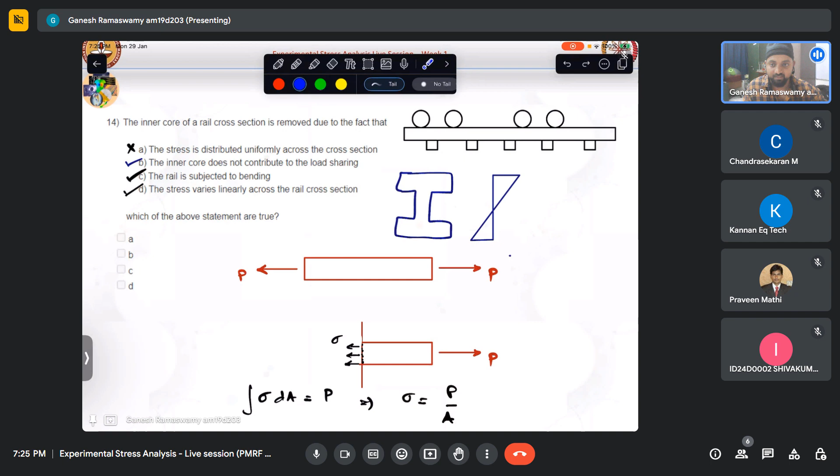Okay. So let us look at the next question. Which of the following are true regarding functionally graded materials? So till now, we have seen generally when we take, even if I were to take that spanner problem, generally what will we do? We will assume that at each and every point,

let us say this is the sheet. Okay, let me explain it this way. Let us say that this is a metal sheet that I have. Now I cut out a component like this, and then I cut a component like that, and then I cut a component like this. Now, it is not necessary that the sheet has same elastic properties in all the directions. But in order to proceed with the analysis, I have to make certain assumptions. So we make an assumption that the elastic properties along this direction, along this direction, and along this direction are the same. So that is the assumption of isotropy.

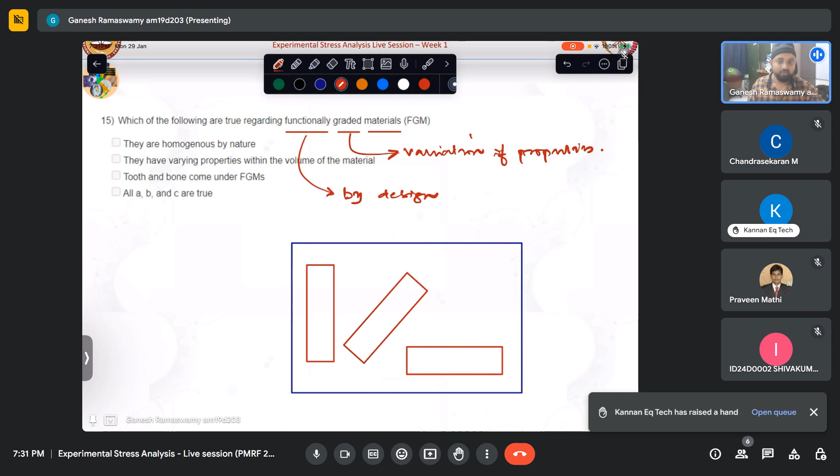For example, if we were to take that same problem here, let us say we want the material to be very strong here because it is taking a high amount of stress. We don't want the material to be very strong here because we can do away with less strength, as it is subjected only to a small amount of stress. So if I were to design this piece of material in such a way that as I move away from its center, it gets stronger, then I am designing it that way. So there is a functionality behind that, and I want the material property to be graded in that particular way. So that is what we mean by functionally graded material.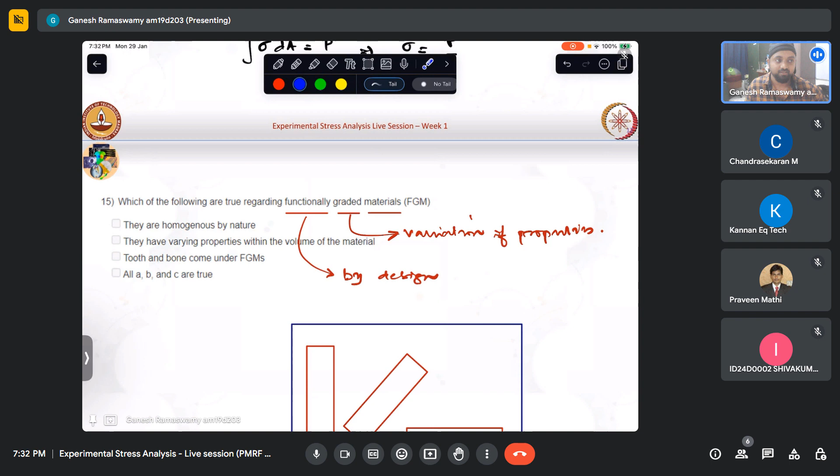Essentially, if we look at our femur, our bone and our teeth, they are very hard on the outside. And if we go in and check the properties, it will be very, very soft because the nerve endings are connected to the nerves. So it has this inbuilt quality which has come about by evolution. So there are natural materials that are functionally graded, but to analyze and design these is a Herculean task. So that is under the purview of research, extensive research on how to create functionally graded materials by blending and how to have control over it. So there is much such research taking place.

So when we say functionally graded, it is definitely not homogeneous because from point to point, the material has variation in properties, which is by design, not by chance or by accident, or it is not inevitable. We have put it there. They have varying properties within the volume of the material. Essentially, I was talking only about a sheet. If you take the out of plane variation also, we will come to the volume also. Tooth and bone are examples of functionally graded materials.

Because we spoke of the tooth, if we look at the bone marrow, even the professor mentions this a couple of times in the lecture, the bone marrow is responsible for the production of hemoglobin, blood. So that has to be very soft, whereas its entire strength comes from the outer core, which has to take bending and twisting. And we know from bending and twisting that the strength is directly proportional to the moment of inertia. For any section, it can be characterized by two things. One is the area, one is the distribution of the area, which is nothing but the moment of inertia. So now, if I have a section, the farther I place the material from its centroid, the greater the strength it has in terms of bending and twisting.

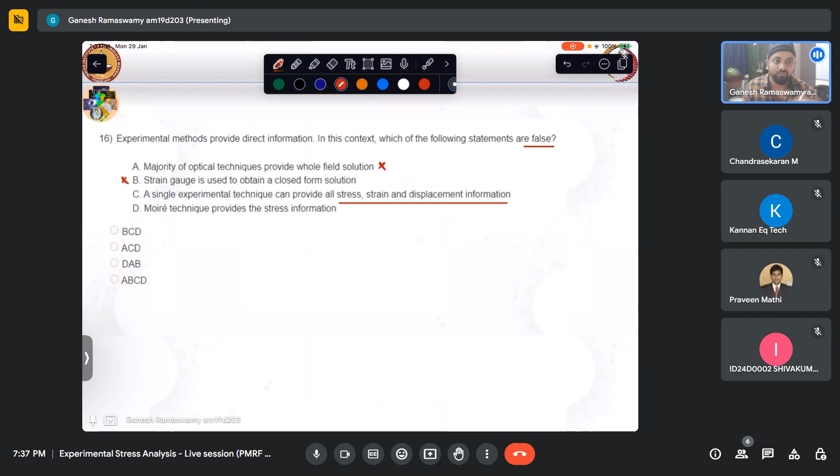A single experimental technique can provide all stress, strain, and displacement information. As we saw, in numerical methods, once you make a numerical model and you have verified it, at the click of a button, you can get the field parameters, namely the stresses, the six stress components. You can get the six strain components and the three displacement components as well. But experimental techniques employ a certain physics which has been observed, and we try to interpret the answers for that.

For example, as we saw here, in this particular case, we saw that certain materials have this property of stress induced birefringence. So when we exert applied loads on them, they develop stresses. It induces stresses inside, which manifest themselves in the form of these fringe patterns. So there is a physics behind it. Similarly, we saw this interference that is happening. So we have employed this technique and developed it as Moire in order to measure displacement.

So each and every technique is based on some physics, and there is nothing that can capture all the three at once. So experimental techniques are very specialized, but nonetheless very useful. Let me not confuse by putting ticks and crosses. This is true. This is false. A single experimental technique cannot capture everything. So essentially, we have to find the suitable technique for what response we are trying to study.

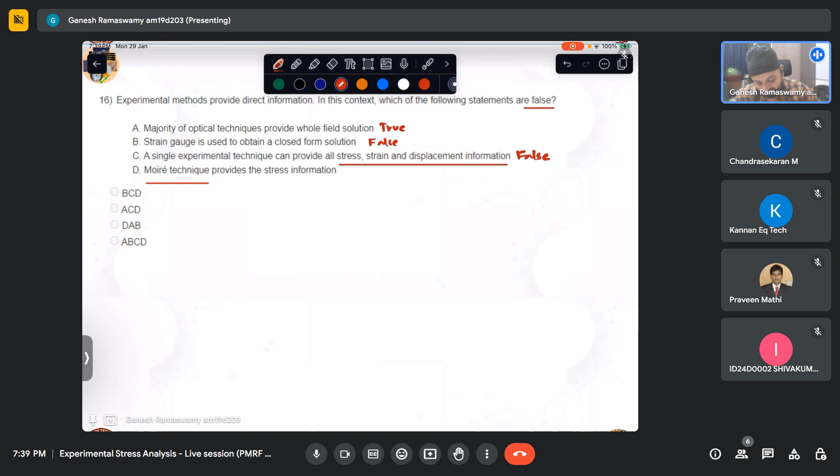So economics and precision, and so many other things go into selecting the technique. And Moire technique, as we saw, measures displacement and not stress. So essentially, this is false. So from the perspective of the question, which of these are false? B, C, D are false. So I hope that is clear. So let us move on to this question.

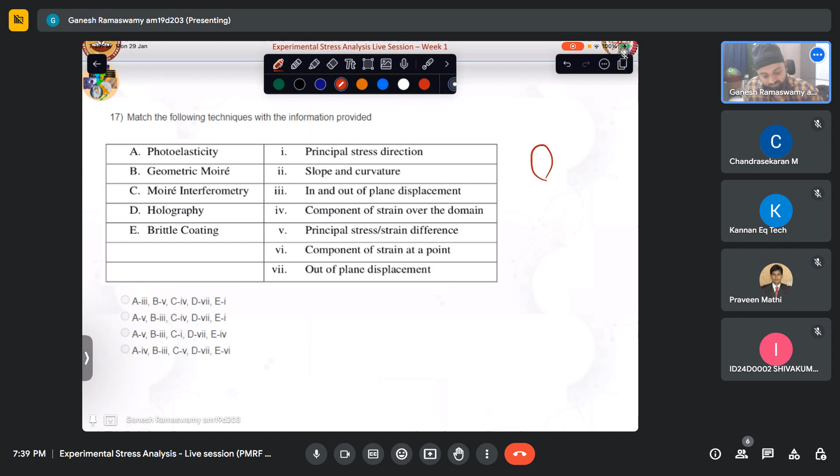It says match the following techniques with the information provided. Photoelasticity, geometric moire, moire interferometry, holography, and brittle coating. So essentially, what is the difference between these two, geometric moire and moire interferometry? Interferometry has an extremely fine grating. We saw one grating. We saw this fan. Now we can safely say that we have sort of spokes like these. So the distance between these two spokes will be of the order of centimeters. We can say maybe 1 centimeter or half a centimeter, varying throughout.

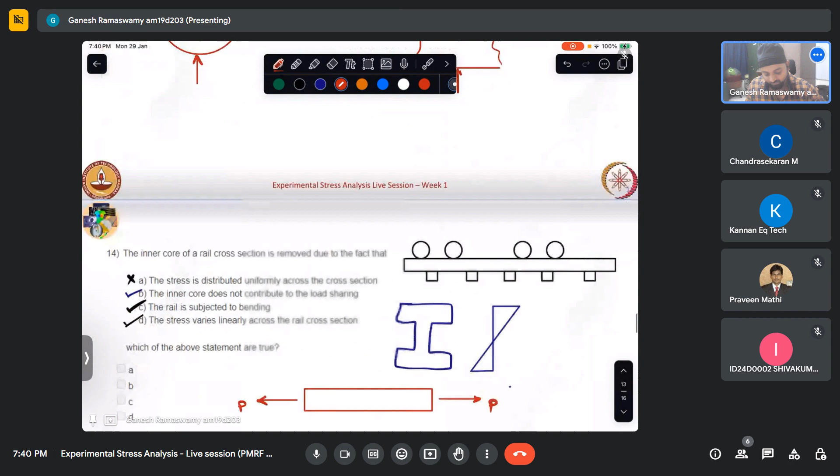So in the case of geometric moire, in 1 centimeter, we may have several lines. In 1 millimeter, we may have a couple of lines in order to carry out the experiment. Whereas there are sophisticated technologies which can manufacture gratings, gratings meaning patterns with those lines. Those lines can be so dense that within a millimeter they are able to make hundreds of lines. It's a very sophisticated technology. So when we have such gratings which are very fine, we need special techniques in order to interpret the results also. So that comes under Moire interferometry. When the gratings are reasonably coarse as compared to them, it comes under the category of geometric moire. Both have different precision levels also in order to measure the displacement. So that is one difference between these two.

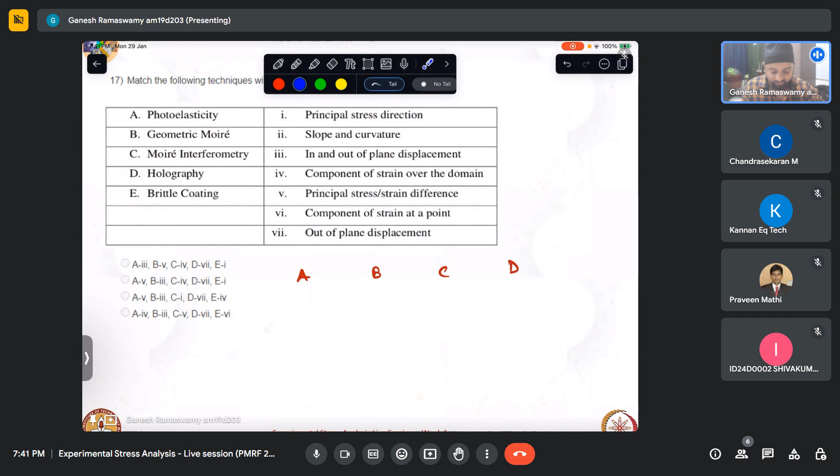So let us see A, B, C, and D. So clearly we know photoelasticity gives us principal stress or strain difference. Now it begs the question, till now we were talking about principal stress difference only. Then where does this principal strain difference come in? Now photoelasticity has many variants. One is called transmission photoelasticity. Of course, these will be covered in detail when we go further in the course, but I'm just giving you a brief of that. Another is called reflection photoelasticity. This basically measures sigma 1 minus sigma 2. This measures epsilon 1 minus epsilon 2. What is epsilon 1? It is the maximum principal strain.

So one is for transparent medium. The other is for any opaque medium over which we will coat something that has that property. We will see more about this when we get to that module. But we can also measure principal strain with this. So essentially, photoelasticity measures principal stress or strain difference. Okay.

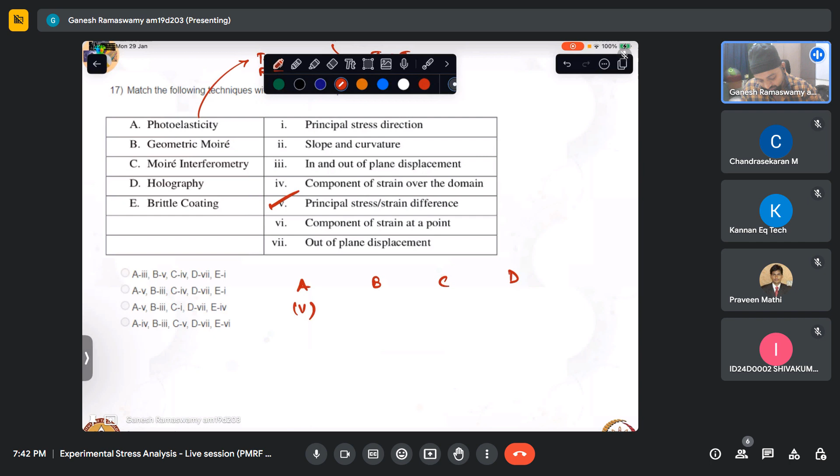Now, geometric moire, we know it measures in and out of plane displacement. Moire in general measures in and out of plane displacements. But if we look at the options, for geometric moire, they're saying it can either measure principal stress or strain difference, or in and out of plane displacement. So it would have to be in and out of plane displacement.

And now let us say that we have 2 points, and then these 2 points deform to here. It was connected using a line. It is like this. So if its length is L, this is my V displacement and this is L. So how is strain defined? Strain is nothing but the gradient of displacement. So essentially strain will be V by L. Strain in one particular direction, I'm saying. I picked a poor example. What I meant to say is, if you were to take it lengthwise, strain is nothing but change in length upon original length. That change in length can be decomposed into 3 components. So naturally, we can get strain from there.

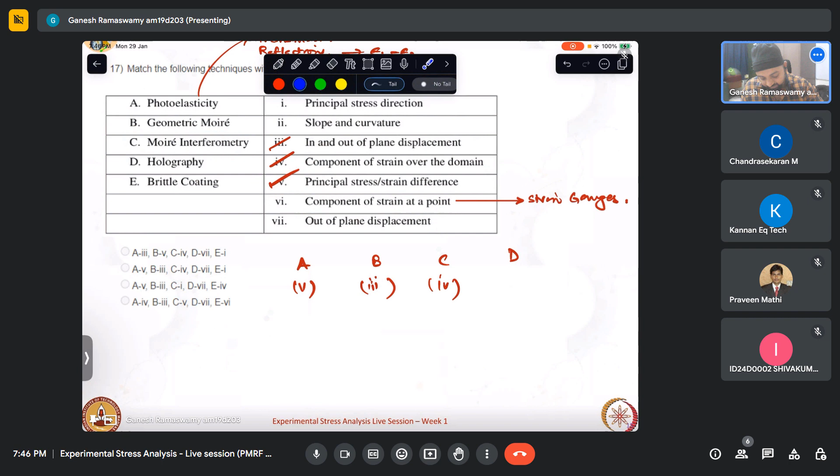Then let us come to brittle coating first. Now what essentially is a brittle coating? Let us say we have a component which is subjected to some traction and some constraint. So this is stressed. And in general, we know from our theories of failure also that brittle components fail in tension. From maximum principal stress, they fail.

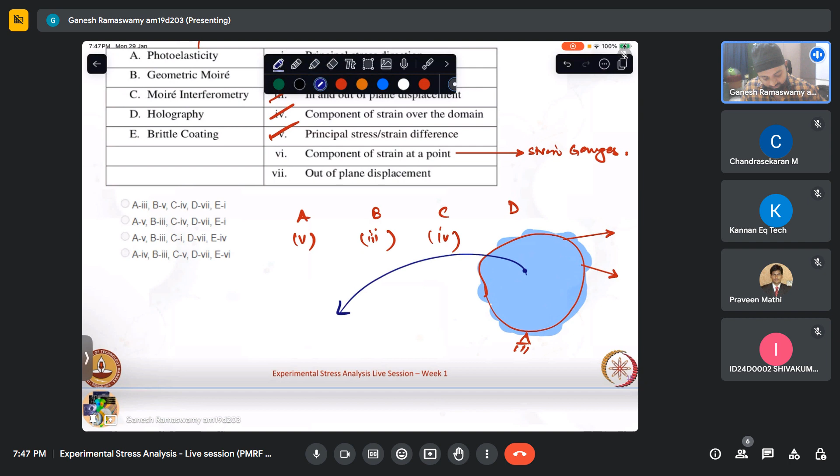So if I coat this material over with some kind of a coating which is very brittle in nature, and let me consider one point here, and then draw the state of stress at that point. So this will again have sigma x, sigma y. I'm just figuratively drawing these. These need not be tension or compression. It will depend on the type of loading and the point that we are considering. Let us say that the stress state is like this.

So when a brittle material is stressed like this, because the brittle material is coated on the test specimen, and we are loading, which is leading to a stress state like this, essentially this can be decomposed into some plane where we have sigma 1 and let us say sigma 2, like that. Again, it can be tensile or compressive. I'm just telling you one example. So what we did, we took a test specimen, we coated it with a brittle coating, and then we loaded it. At this point, the state of stress was like this, which can be decomposed like that. Since the material is brittle, it will fail by maximum principal stress theory. So if maximum principal stress is tensile like that, essentially I'll have a crack that gets formed in the coating like that.

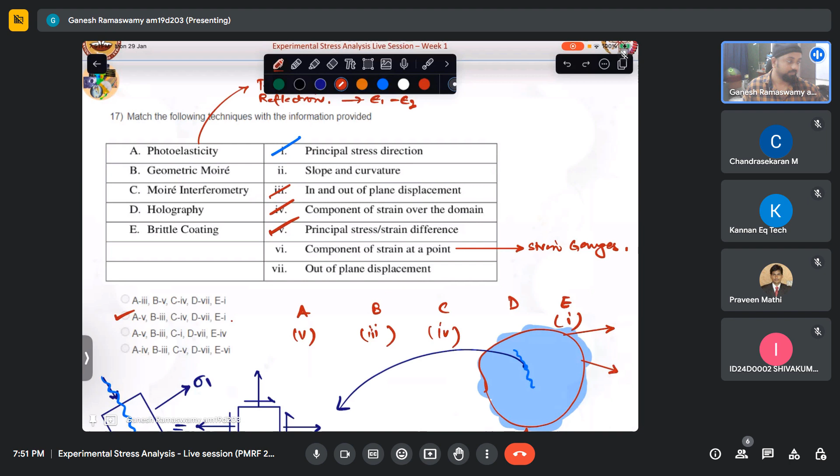In any case, we can go into each and every method that is mentioned here and try to understand what is the physics and how it tries to measure, which will be taken up in the subsequent weeks. So anyway, I have run out of questions and we have nearly run out of time. So we'll end it by 8. So based on what we have discussed, if there are any questions, please feel free to ask.

Was it clear, the discussion? Are there any questions? Anything that is not clear? Anything you want me to explain again? Am I going at a comfortable pace for you, or should I slow down? Yes, please. Go ahead. Okay, fine. Thank you. Yeah, that's all right. Okay, it's clear. Yes.

In the subsequent weeks, if you look at the lectures, at least a schematic of the principle is explained. Naturally, because there are so many different techniques, and in fact, the techniques are also developing over time. Now we have something called digital image correlation that was not there earlier for displacement measurements. So techniques are also evolving and we are getting new techniques by the day. So naturally, to accommodate each and every technique into the course is a big challenge. But the professor has done it in a very professional manner.

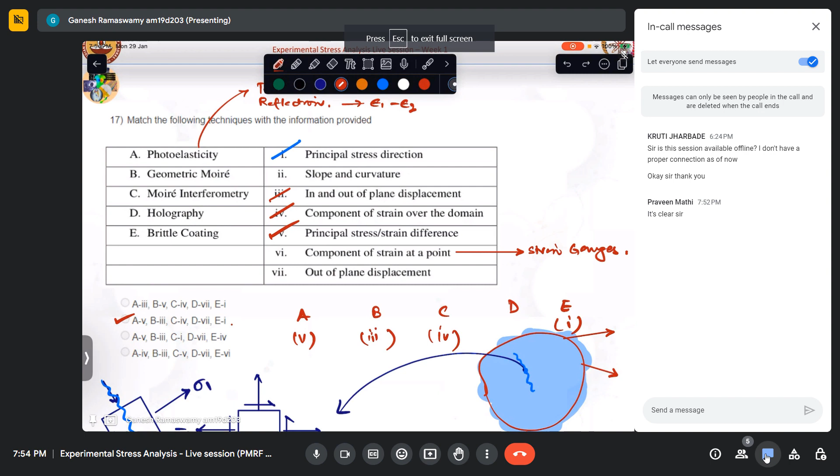Okay, yeah, all right. Okay, so someone had, yeah, thank you. Mr. Praveen, okay, it is clear. Okay, thank you very much.